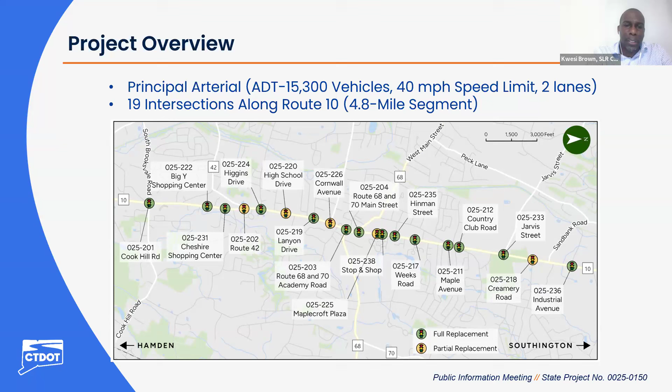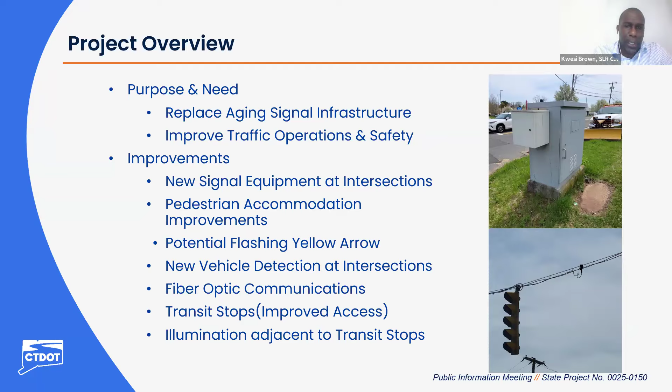So why are we doing this project? The purpose and need is really to replace aging signal infrastructure. A lot of the signals are over 20 years old and are in dire need of replacement. Additionally, we are looking to improve traffic operations and safety, not just for motorists or vehicles, but also for pedestrians, bicyclists, and transit users within the corridor. In terms of improvements: new signal equipment at these intersections, pedestrian accommodation improvements in terms of ramps and crosswalks, and we're looking to implement flashing yellow arrows at some intersections to enhance safety for left-turning vehicles. We'll also implement new vehicle detection at the intersections, fiber optic communications between the individual traffic lights along the corridor to enhance traffic flow, and improved access to transit stops. There are a number of bus stops along the corridor, and the goal is to improve access to these stops. Finally, we want to improve illumination adjacent to transit stops as well as crosswalks, in line with the Connecticut DOT Complete Streets Directive.

So I'm going to spend a few minutes to touch on each of these 19 intersections. I know they are a lot. I'll do my best not to be too detailed and to touch on some of the key aspects of each intersection. What you would see, in terms of existing conditions and existing needs, is a recurring theme as I talk through each of these 19 intersections.

The first intersection, the southernmost within the corridor, is the Cook Hill Road at Route 10 intersection. As you can see from the aerial on the right, it's a five-legged intersection, a little atypical, unconventional. Currently the signal equipment out there is span wire. As you can see from the graphic, there are no crosswalks at this location, and there is no pedestrian signal equipment at all. There is currently a bus stop at this location, and we also found out from talking to town staff that there's a planned transit improvement project, I believe the Elim Park bus stop improvement project, that will look to enhance some of the transit stops at this location. So that's something we'll be cognizant of as we go through our design.

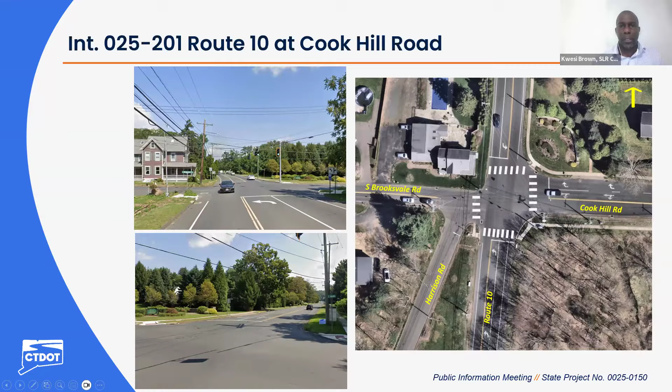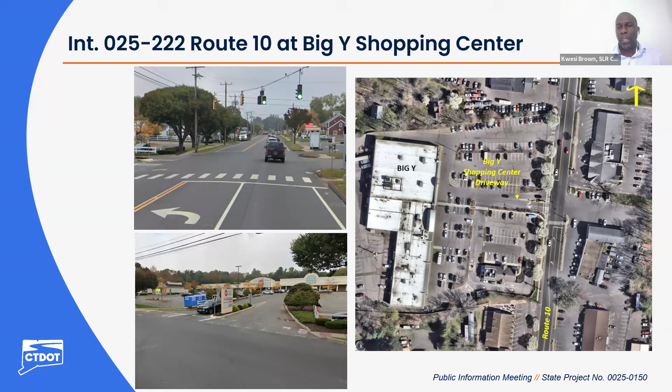This next intersection, 25222, is the Big Y Shopping Center at Route 10 intersection. This is also a full replacement location. As you can see from the graphic and some of the photos, there are two crosswalks at this location: one across the Big Y driveway, and one across the southern leg of Route 10. The Big Y driveway does not have any pedestrian signals. The crosswalk across Route 10 has pedestrian signals on either side. So what we're looking to do is introduce crosswalks on all the legs at this location, and also improve all the signal equipment, including pedestrian signals. Next slide.

The next intersection to the north is the Cheshire Shopping Center intersection. Again, it's a recurring theme: this is a span wire design for the traffic signal lights. There's currently one crosswalk across the southern leg of the intersection, that's Route 10, with a pedestrian signal at either end of the crosswalk. Again, there's no bus stop here. What we're looking to do is implement crosswalks on all the legs, with a full replacement including pedestrian signals, new controllers, new illumination, etc. So this is again a full replacement in terms of the signal equipment. Next slide.

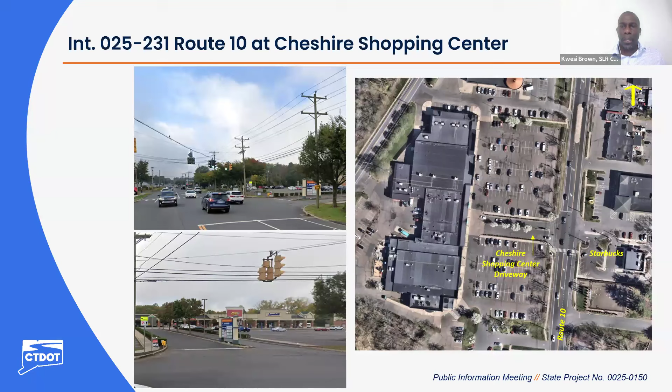The next intersection to the north is Route 10 at Route 42. This is the first of the 5 partial upgrade intersections. This intersection currently has mast arms, not a span wire design, and the mast arms are fairly new, so we will be doing a partial upgrade.

As you can see, there's only one crosswalk across the north leg of Route 10. We're looking to enhance the pedestrian signal infrastructure at this location, and we're proposing an additional crosswalk across Route 42 as part of the improvements. The mast arm and signal heads will remain, and we'll focus our efforts on pedestrian signal infrastructure and some vehicular detection improvements.

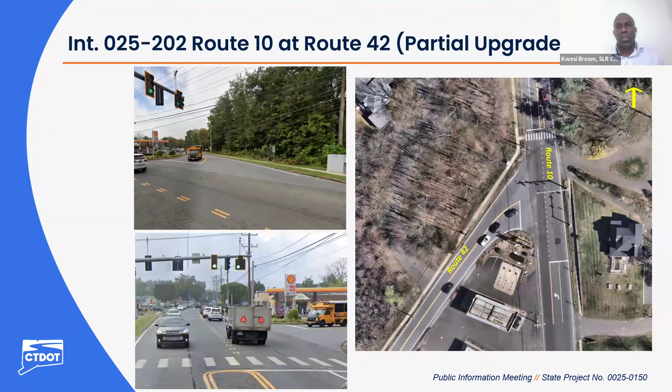Next intersection is Higgins Road at Route 10. This is a span wire design. There is currently one crosswalk across Higgins Road, no pedestrian signal equipment at all, and there's currently a bus stop at this location. So this is a full replacement. All the things we've talked about—additional crosswalks, ramp improvements, pedestrian signal equipment, improved access to the bus stop—will be looked at for this intersection.

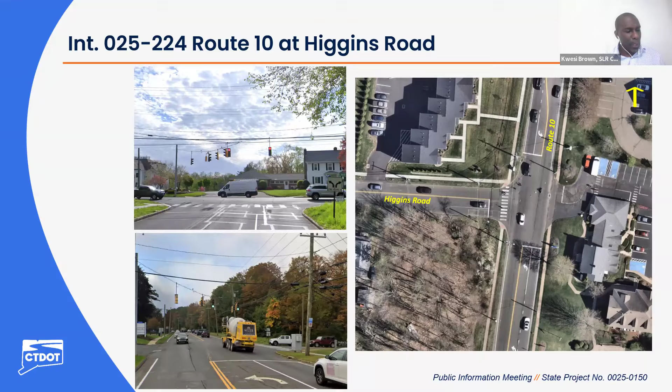Next one up is the Cheshire High School Drive intersection with Route 10. This is a partial upgrade location. As you can see, there are crosswalks on 3 legs, pedestrian signal equipment, and this is currently a span wire design. For the partial upgrade, we're focusing our efforts on pedestrian signal infrastructure upgrades. We're looking to add an additional crosswalk across the southern leg of Route 10, provide new pedestrian signal equipment, and advanced detection for vehicles at this location.

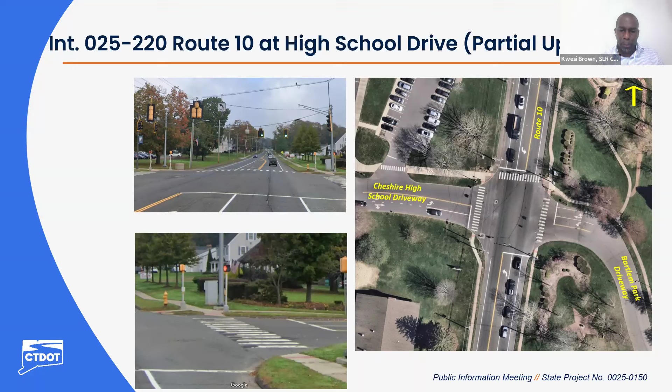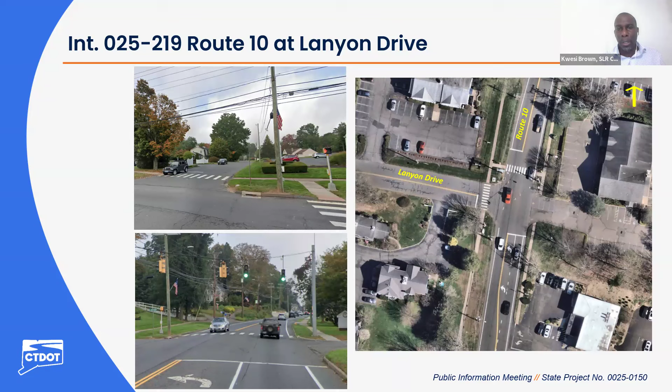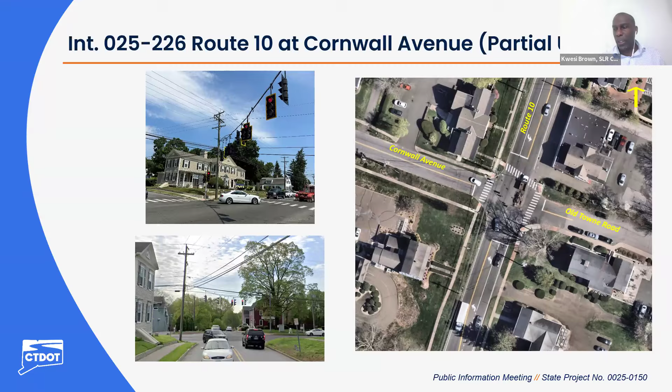Cornwall Avenue is a partial upgrade. Again, I already talked about the sidewalk connection between Cornwall and Lanyon Drive. We'll be looking to add an additional crosswalk across the south leg of Route 10, with enhanced pedestrian signal equipment, new ramps, and improved vehicular detection at the intersection.

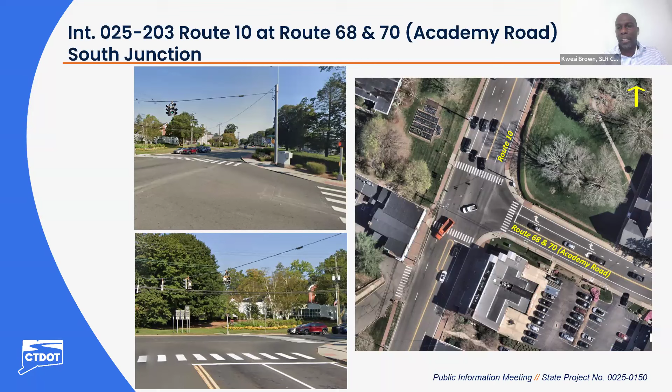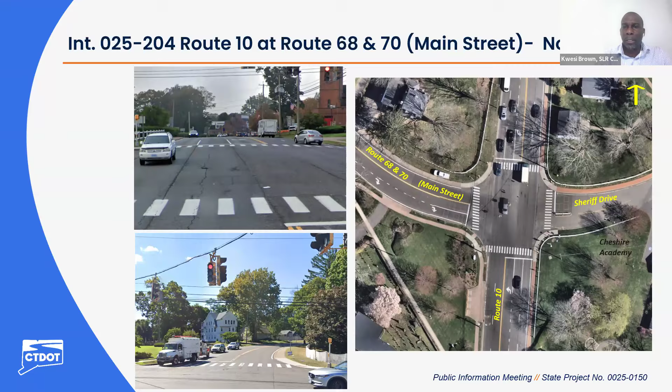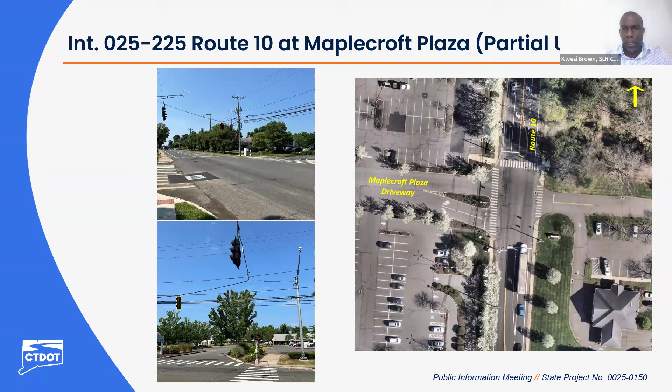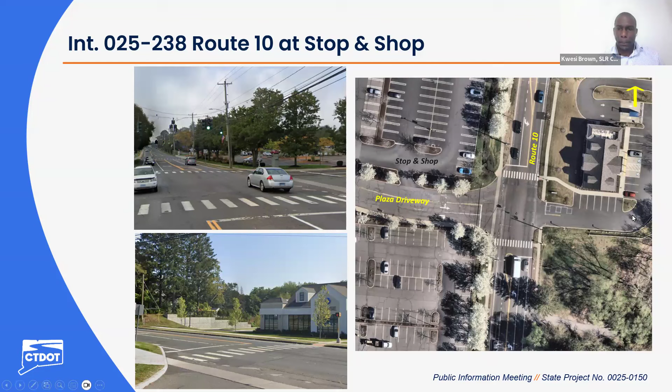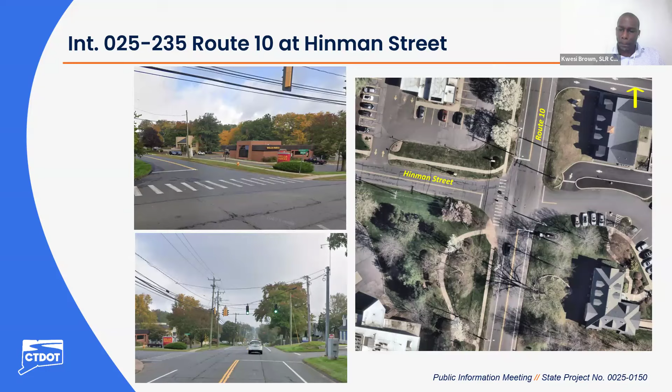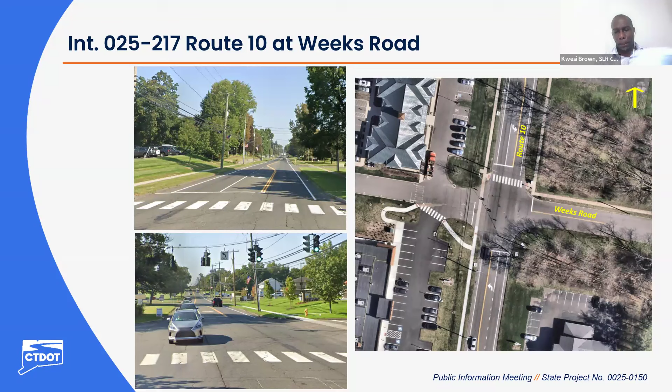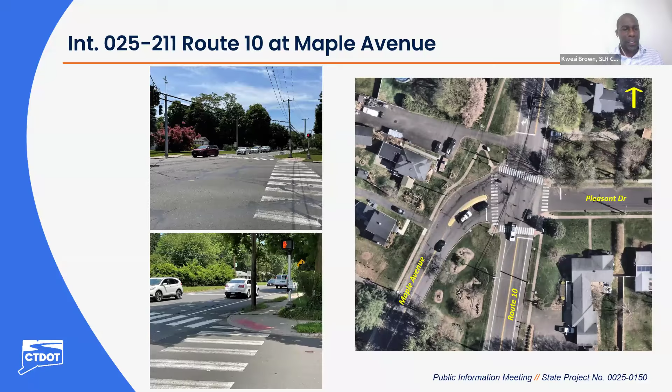Route 10 at Maple Avenue is again a full replacement location. We'll be replacing the existing span wire design and replacing all the pedestrian signals currently existing at this intersection. There's one on each end of the crosswalks at this location, but they are old and need to be replaced. We'll be keeping the crosswalks on all legs at this intersection as well.

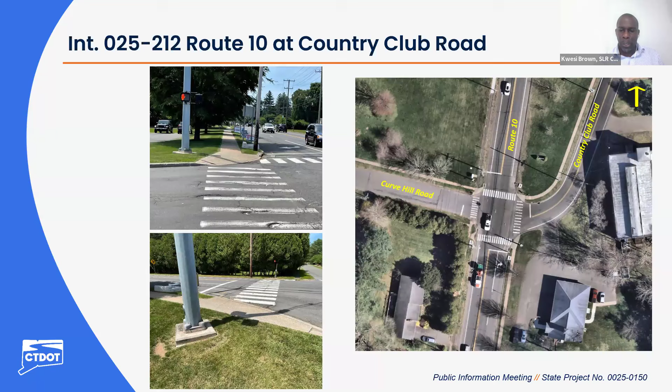Route 10 at Country Club Road is a full replacement. It currently has crosswalks on all legs, as you can see, with pedestrian signal equipment, but we'll be replacing all of that with new ramps as well, and with new vehicular traffic signal equipment, with detection and enhanced communication at this location.

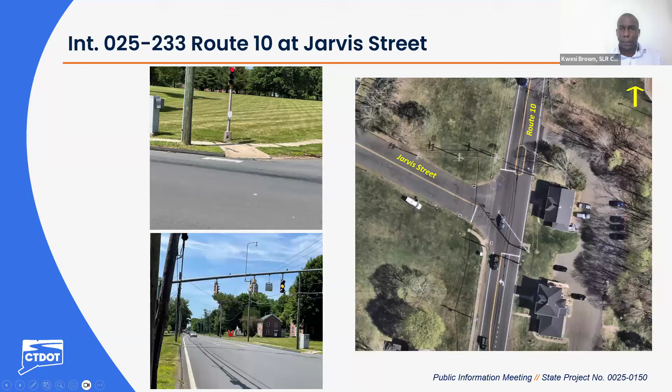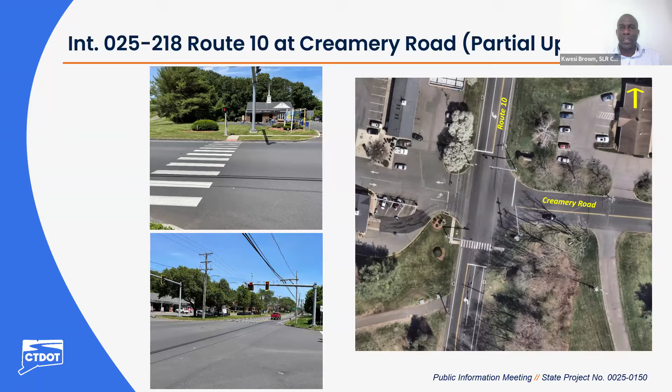Route 10 at Creamery Road is a partial upgrade. The pedestrian signals here are fairly new. They have mast arms, and there's currently one crosswalk across the south leg of the intersection across Route 10 with pedestrian signal equipment. But again, we want to make it safer, so we'll be adding additional crosswalks on the remaining 3 legs with pedestrian signal equipment, and improved vehicular detection at this location as well.

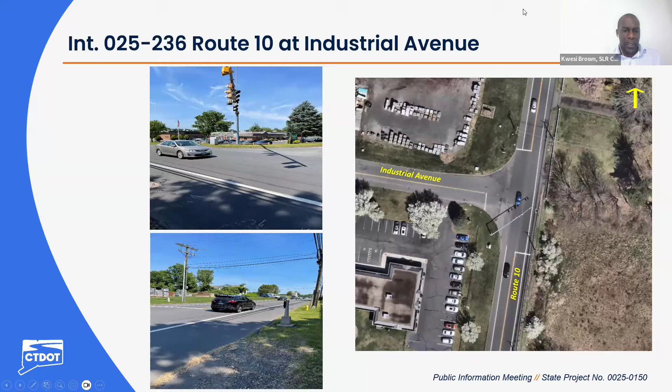So I know it was long, but it gives you a flavor of the existing conditions. I already touched on some of the improvements, but I'll reiterate that what we're really looking to do with the traffic signal equipment is introduce new mast arms instead of the span wire design, with new traffic signal heads, new detection for vehicles, new controllers to control the intersections. Emergency preemption equipment would be upgraded as well throughout the corridor, and also improved communication between the 19 traffic signals within the corridor to ensure good traffic flow.

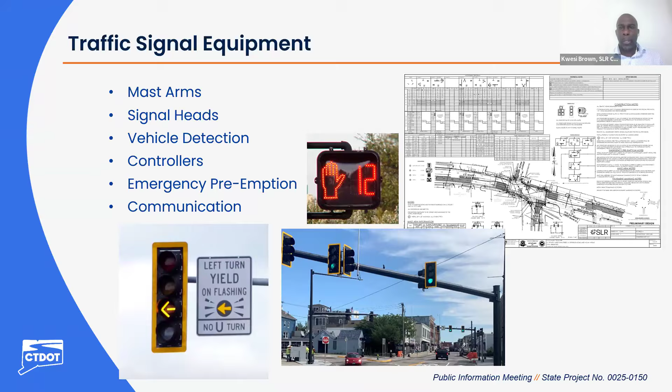With respect to pedestrian accommodations, it will be new crosswalks with ADA compliant ramps. We'll be looking to add new sidewalk connecting ramps to the various bus stops within the corridor, pedestrian signals with push button upgrades, and also implementing blank out signs, which have indications of no turn on red or turning vehicles, used to enhance safety for pedestrians as they navigate through the intersections within the project area.

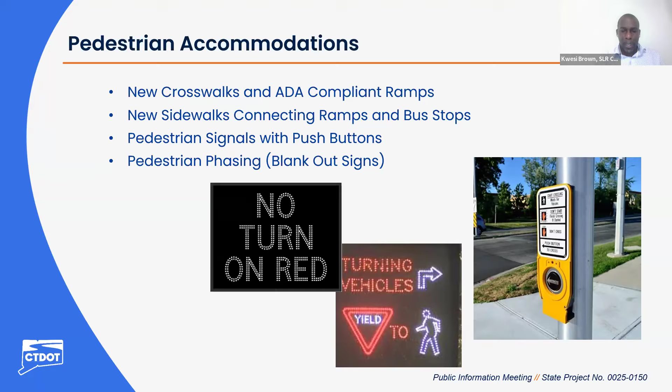So with that, I'll hand over to Tom Daley to talk a little bit about detection and the fiber communications within the corridor. Tom: Great, thanks. Thank you, Kwesi.

So yes, as part of the signal improvements, we'll be upgrading the vehicle detection equipment. This will include 360-degree bell cameras, shown in the photo in the upper right, used for stop bar detection for all approaches to detect the presence of vehicles waiting at the stop bar as a trigger to switch the cycle from red to green. And then radar detectors, shown in the bottom right, will be installed, used for advanced detection of approaching vehicles along Route 10.

They detect the vehicles several hundred feet in advance of the intersection and extend the signal green time to allow the approaching vehicles time to clear the intersection.

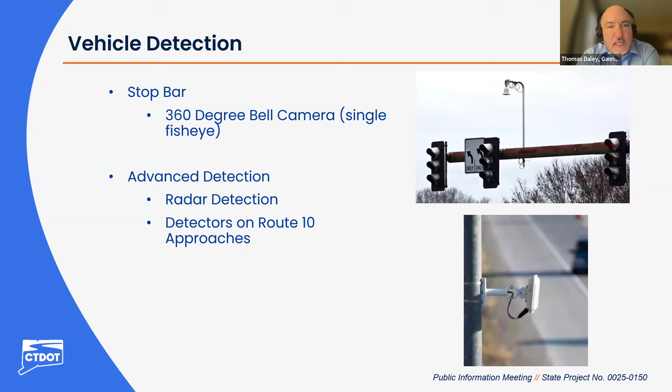The fiber optic communication systems will be upgraded as part of the project to help improve corridor performance and mobility. The new fiber optic communications will replace the existing copper wire system. The fiber optic cable will run the entire length of the corridor and connect to each of the traffic signals, allowing for communications and coordination between the intersections.

A master signal controller will include a wireless cellular system that communicates to the DOT operations center. These communication system upgrades will provide a more reliable network and enhance the DOT's ability to respond to operational issues and traffic incidents. And with that, I'll turn it back to Kwesi.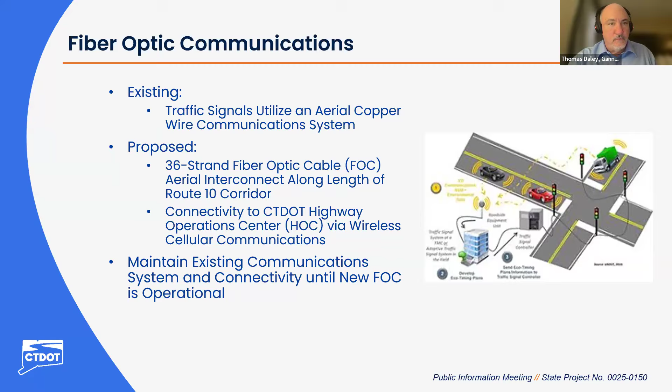Thank you, Tom. So we feel that it's really important to have good project coordination throughout this project. We've already started doing that, working closely with Connecticut DOT, but it's imperative that we're working closely with the town engineering staff as well.

So we had a meeting in September, and we were able to get some good feedback from town staff as well as the police chief. We were able to talk about some of the town projects and initiatives we should be cognizant of, such as the East Mitchell Avenue sidewalks and the Ellen Park bus stop projects. It's important to coordinate all these initiatives and projects.

In addition, we'll be coordinating with the utility companies throughout the process to make sure there are no missteps. We'll be scheduling a virtual utility meeting and field utility meetings throughout this project, and we're going to continue coordinating with the town every step of the way to make sure we're on the same page and this project is successful.

I want to ask Malcolm Thomas to talk a little bit about the right-of-way process. As we go through this project, we anticipate there will be some impacts to property in terms of traffic easements, but that process is ongoing and we haven't finalized those impacts yet. As we identify these easements, we'll have to go through the Connecticut DOT right-of-way process, and I'd like to invite Malcolm Thomas to talk to us about that process and what it entails.

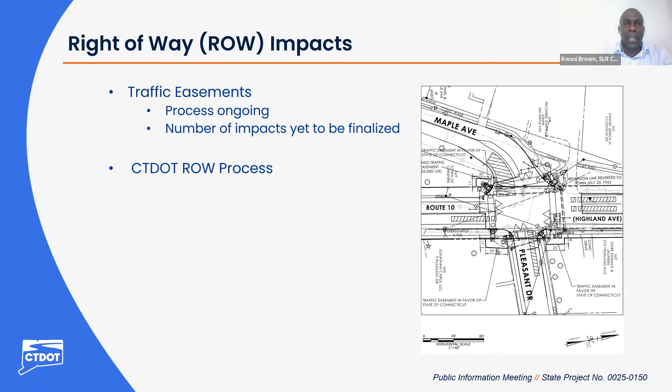Thank you, Kwesi. As mentioned, I'm Malcolm Thomas, Assistant Project Coordinator with the Department of Transportation Right-of-Way Division. Our office's responsibilities are acquiring the needed property rights and property for transportation projects throughout the state. I'm here to provide a brief overview of the acquisition process and the required property rights to be acquired.

This is done in accordance with State General Statute Section 13A-73 and 13A-98E, as well as the Uniform Act. As mentioned, this project will require acquisition of property rights. Specific property impacts for this project are still being finalized and may need changes as the design progresses.

Once the design has progressed to a development milestone and all the impacts from the project have been determined, the right-of-way acquisition process will begin. Impacted property owners will receive a formal letter of intent to acquire, along with the property map, depicted on the screen, showing the exact property rights to be acquired.

Our office will determine a fair market value for those property rights, which will be used to establish an offer of just compensation. The offer will be sent to the property owner in writing, and a right-of-way agent will be available to meet with the property owner to explain the project, go over specific impacts to their property, and explain the state's offer. The property owner will have a reasonable amount of time, typically 30 days, to consider the state's offer and enter into negotiations.

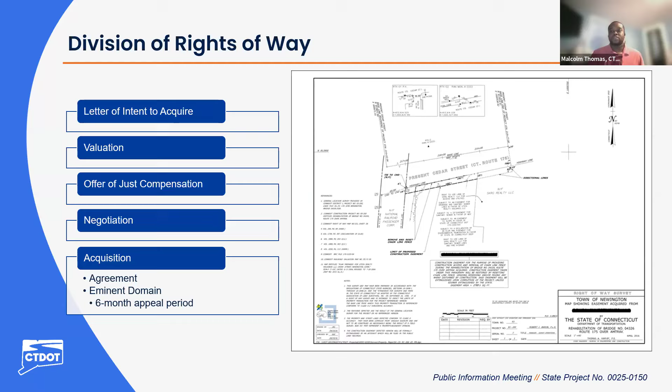And I believe back to Kwesi to continue the presentation. Thank you, Malcolm.

So in terms of project cost and schedule, we currently are anticipating a construction budget of about 18.4 million, which is 80% federally funded and 20% state funded. But of course, as we go through our design, this number is going to be fine-tuned as we get a firm number by the end of our design.

In terms of the schedule, we completed preliminary engineering, and our preliminary design is currently under review with Connecticut DOT. We anticipate to complete semi-final design in March of 2025, with final design plans completed in October of next year, and hopefully advertising of the project in January 2026, with a construction start date of summer of 2026. Next slide.

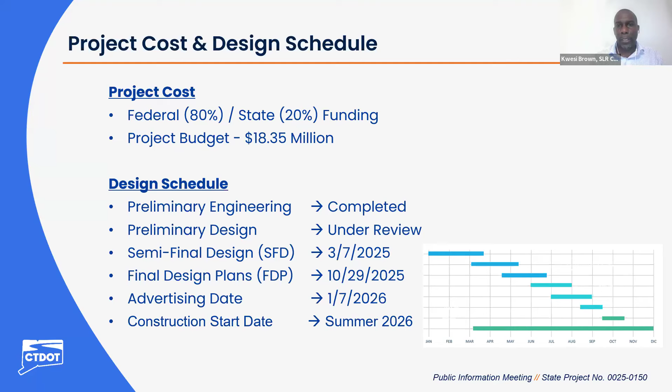So in terms of next steps, hopefully we're going to get feedback from Connecticut DOT on the preliminary design. We'll be looking to advance the semi-final design, and part of that process is to incorporate any feedback we receive from the public today to further fine-tune our design. We'll identify rights-of-way needs, as Malcolm talked about, and we're going to have continued coordination with the utility companies and with the town to further advance this project. Next slide. And with that, I will hand over to Jay.

Great. Thanks, Kwesi, Malcolm, and Tom as well. Appreciate you guys helping out with the presentation. That concludes our formal presentation for the design portion of this traffic signal replacement project along Route 10.